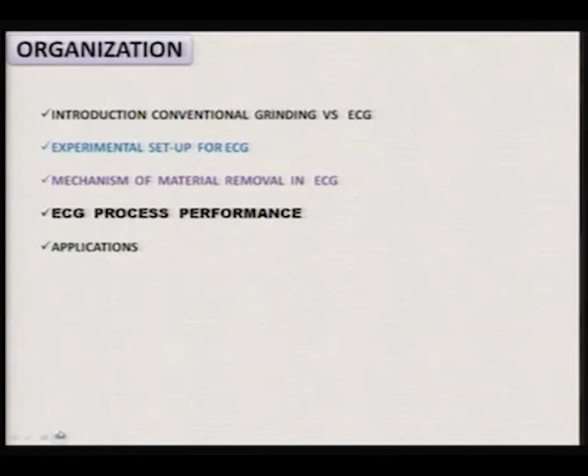Welcome to the course on advanced machining processes. Today I am going to discuss electrochemical grinding, which is an allied process to electrochemical machining and also named as a hybrid process. The organization of this talk is as follows: introduction to conventional grinding versus electrochemical grinding, experimental setup for electrochemical grinding, mechanism of material removal in electrochemical grinding, electrochemical grinding process performance and applications. After that I will discuss one numerical example also.

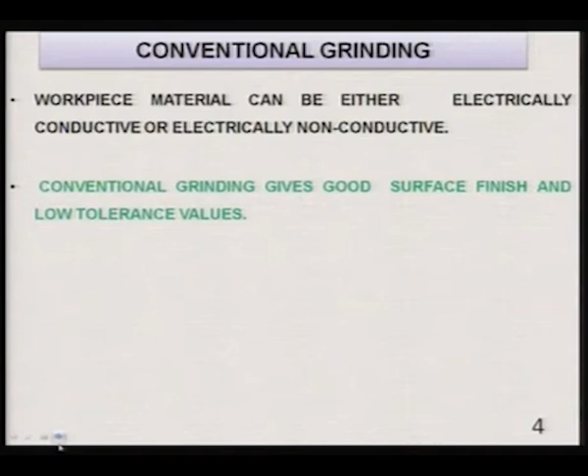Introduction to conventional grinding versus electrochemical grinding. In conventional grinding, as we all know, workpiece material can be either electrically conductive or electrically non-conductive. That condition is not required, that the workpiece should be electrically conductive. Conventional grinding gives good surface finish and low tolerance values. It produces burrs, heat affected zone (HAZ), and thermal residual stresses in the finished parts, and the finishing rate is okay. In case of conventional grinding, 100% material removal takes place by abrasive action only.

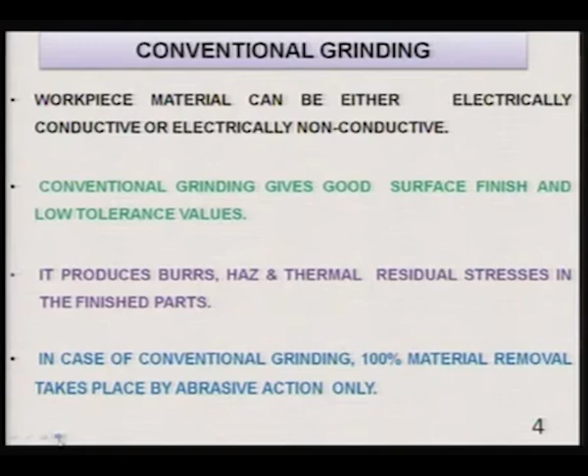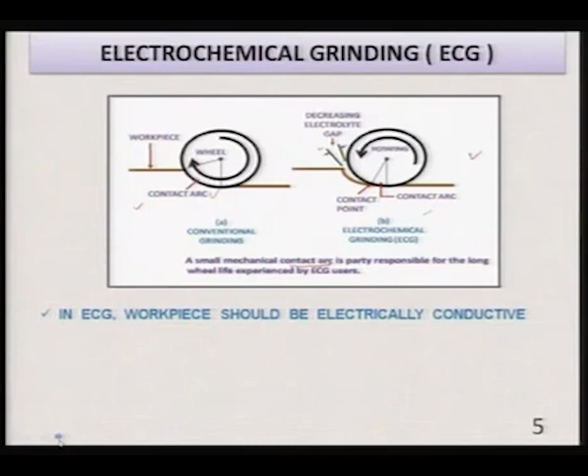In ECG, the workpiece should be electrically conductive. This is the first basic requirement, because as I will show, the workpiece is made anode, exactly same as in case of electrochemical machining, sorry, not the cathode, and the grinding wheel is made as the cathode. So both grinding wheel as well as workpiece should be electrically conductive.

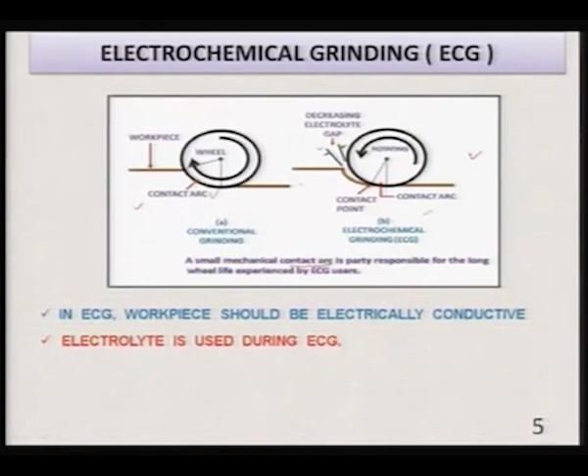Electrolyte is used during electrochemical grinding, and this is supplied with the help of the nozzle as shown on the right hand side of the figure. After proper filtration, the electrolyte can be reused or recirculated, as we do in case of electrochemical machining. For electrochemical grinding, the wheel bonding material should be electrically conductive, as I have just mentioned, since it is made as the cathode. So the material should be electrically conductive and it forms part of the electrical circuit of the electrochemical grinding process.

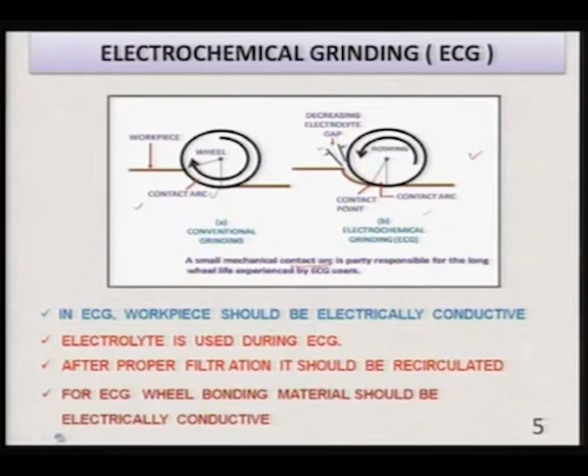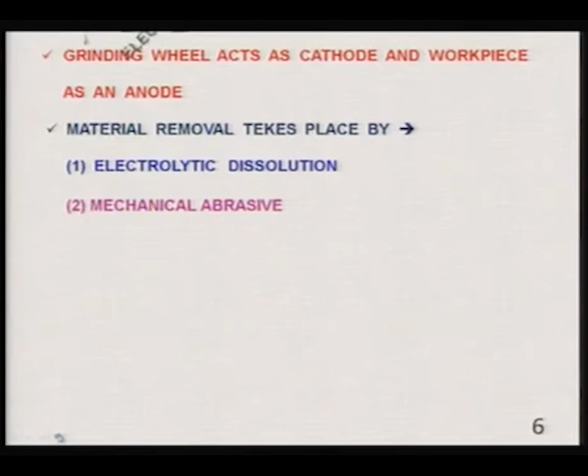Grinding wheel acts as a cathode and workpiece acts as an anode. This is very similar to, or same as, electrochemical machining, where workpiece is made anode and tool is made cathode. Here, grinding wheel acts as the tool. Material removal takes place by electrolytic dissolution and mechanical abrasion by abrasive particles, which are part of the electrochemical grinding wheel. It is found experimentally that mechanical abrasive action accounts for around 10% of the total material removal, while the remaining 90% is due to electrochemical dissolution, as compared to ECM, where 100% of material removal is due to electrochemical dissolution only. Higher wheel life is obtained in case of electrochemical grinding as compared to conventional grinding wheel life.

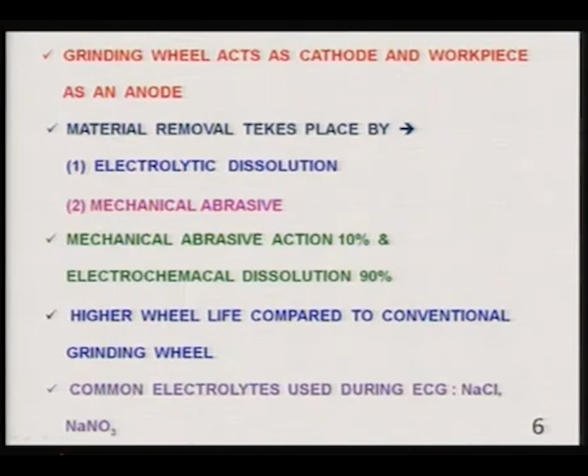Common electrolytes used during electrochemical grinding are the same as used in electrochemical machining, something like sodium chloride, sodium nitrate, and others can also be used depending upon the combination of tool and workpiece material.

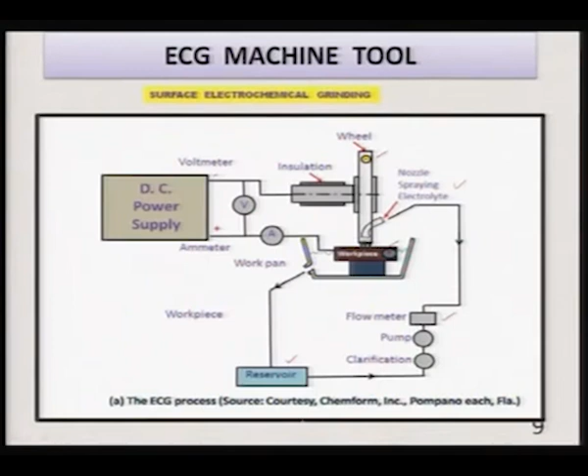Now, you can see here a flow meter is also added to the hydraulic circuit, so that you can easily measure the rate of flow of the electrolyte. Here a reservoir stores the electrolyte before it is recirculated, and here you will also have the filter.

Now, let us discuss briefly the mechanism of material removal in electrochemical grinding. This is a hybrid process, as I have already mentioned in earlier lectures, where we have combined electrochemical machining and grinding, both processes together.

You can clearly see here, to understand the mechanism of material removal in this hybrid process, this is the grinding wheel which is rotating. The whole working zone or grinding zone has been divided into three different zones or phases, as shown here. In phase 1, no abrasive action is taking place because the abrasive particles are not in contact with the workpiece. But in phase 2 or zone 2, as mentioned here, the abrasive particles are in contact with the workpiece surface, and material is being removed by abrasive action as well as electrochemical dissolution.

In phase 3, it should really be starting from here to somewhere here—this is not very precise, and this will form part of phase 2 itself. In phase 3, the wheel has lifted over the workpiece surface, and whatever burrs, etc., are formed, they are being removed—we will discuss this.

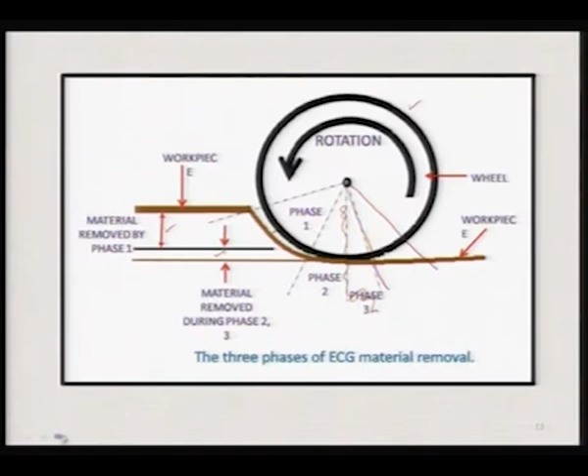Now, the important thing to see here is that material removed in phase 1 or zone 1 is shown here. In this zone, material is being removed by electrochemical dissolution alone. In zone 2, material is being removed by both processes—electrochemical dissolution as well as abrasive action. This clearly gives the picture I mentioned earlier, that three zones are there: zone 1, zone 2, zone 3.

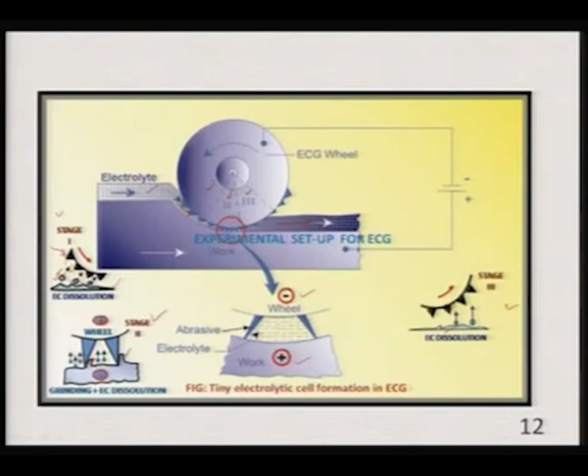But in zone 3, as you see on the right side, there is no contact between the abrasive particle and the workpiece surface, there is only electrolytic dissolution. So material is being removed only due to electrolytic dissolution in zone 3; there is no abrasive action. The same thing is described in the following slides.

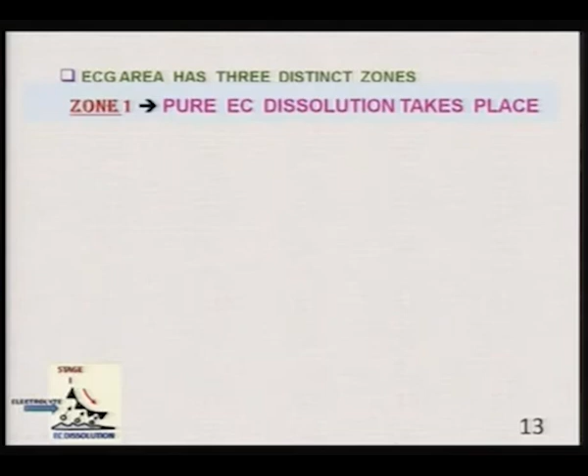ECG has 3 distinct zones, as I have shown you. In zone 1, pure electrochemical dissolution takes place, as you can see in the figure, with no abrasive contact with the workpiece.

Wheel rotation helps in drawing the electrolyte into the machining zone, because the wheel is rotating in this direction as shown by the arrow. So electrolyte will be drawn into the gap between the wheel and the workpiece, apart from whatever pressure it is being supplied at.

Then contamination in zone 1 takes place by reaction products and gases, because electrochemical reaction is taking place. So ferrous hydroxide or ferric hydroxide will be formed if iron is being machined. This, along with the gases evolved—oxygen at the anode and hydrogen at the cathode—will move forward into zone 2.

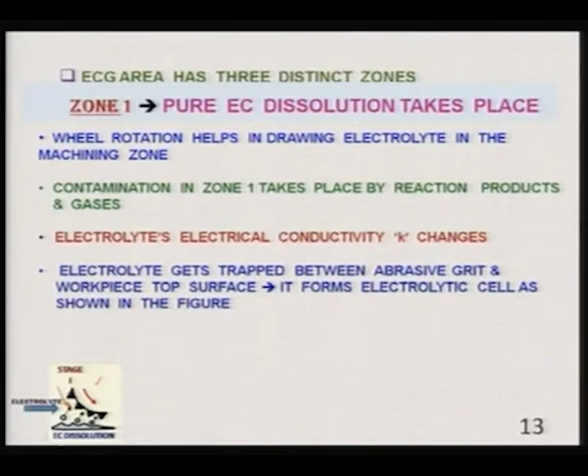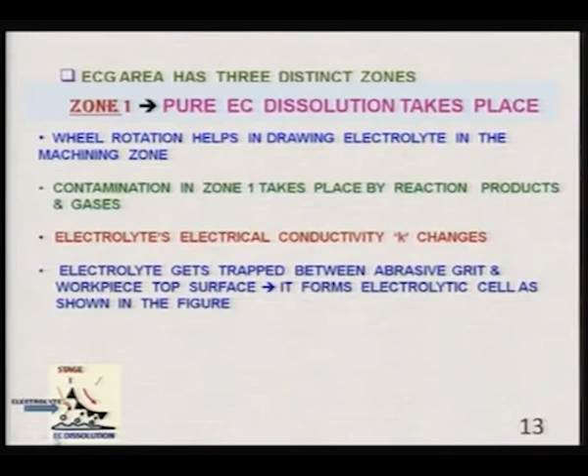Then the electrolyte's electrical conductivity will change, because apart from the pure electrolyte, it now has reaction products as well as gases, and control of the electrical conductivity of the electrolyte becomes very difficult. Electrolyte gets trapped between the abrasive grit and workpiece top surface, forming an electrolytic cell as shown in the figure. A small amount of material is removed in this zone, and the inter-electrode gap is comparatively low.

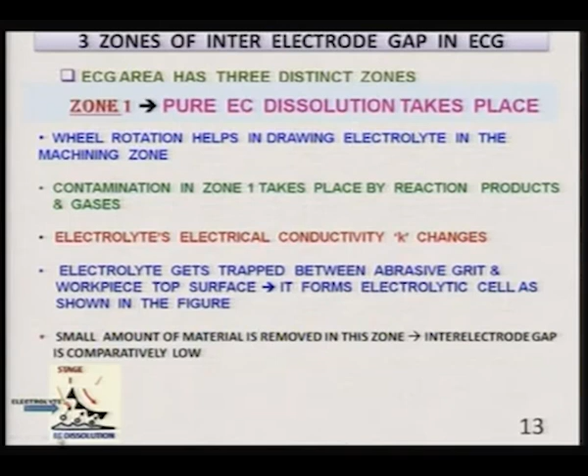In zone 2, higher pressure exists due to the converging gap between wheel and workpiece. It suppresses formation of gas bubbles and gives higher K, hence higher MRR, because the size of the gas bubbles is decreased. So K definitely increases compared to zone 1, and secondly some reaction products are added, which also change the electrical conductivity of the electrolyte.

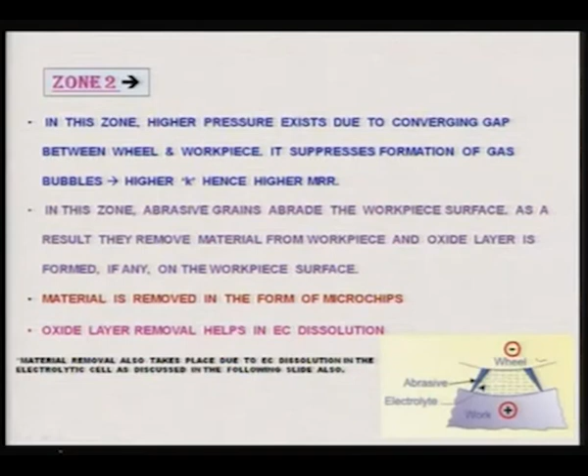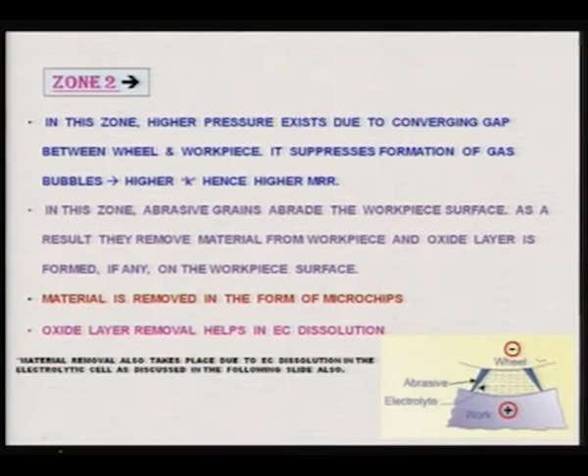Oxide layer removal helps electrochemical dissolution. Whatever oxide layer was formed in zone 1 is removed due to the abrasive action of the abrasive particles, so the rate of electrochemical dissolution increases. Material removal also takes place due to electrochemical dissolution in the electrolytic cell, as discussed in the following slide.

Types of electrolytes used in ECM: you can use acidic electrolyte, alkaline electrolyte, or neutral electrolyte. All these electrolytes we have discussed while discussing the electrochemical machining process.

Reactions during electrochemical machining, while iron is the anode and NaCl aqueous solution is the electrolyte: electrolysis of water takes place, and once electrolysis takes place you get hydrogen gas evolved at the cathode, and you get hydroxyl ions, 2OH. When iron is the workpiece, you get ferrous ions that detach from the workpiece, carrying positive charge, and electrons are also detached.

Then ferrous ions and hydroxyl ions react with each other and form what is known as ferrous hydroxide. In some cases, under certain conditions, in place of ferrous hydroxide, ferric hydroxide can also be formed.

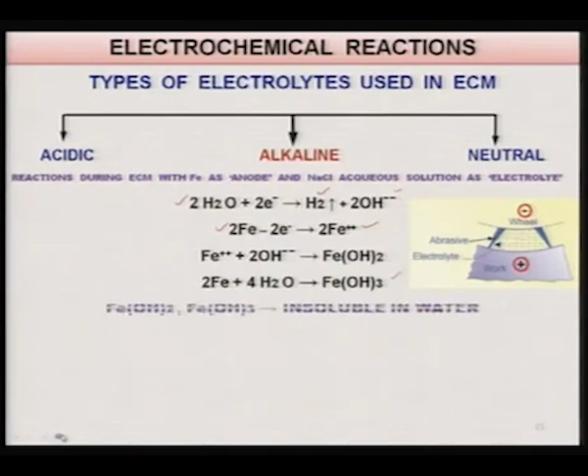Now, this ferrous hydroxide and ferric hydroxide are insoluble in water. So, they remain as such, as reaction products in the electrolyte, and positive ions convert as hydroxides, ferrous or ferric, in case of iron as anode or work material.

Now, in this particular case, as you can see here, the inter-electrode gap is quite low, and it depends upon the projection of the abrasive particle out of the grinding wheel, normally less than 1 millimeter. The voltage applied is around 8 to 20 volts.

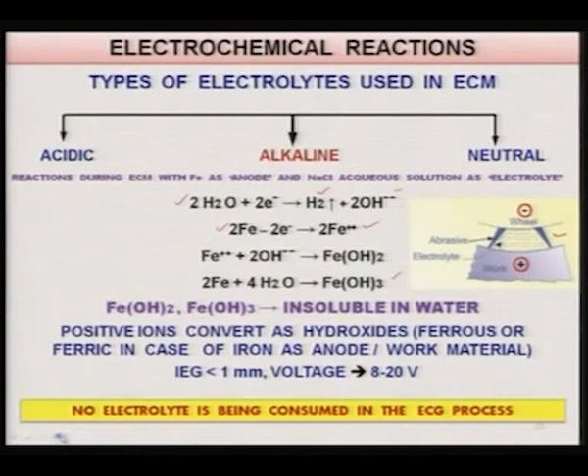Now, we can clearly see from these reactions that no electrolyte is being consumed in the electrochemical grinding process, and this was true in case of electrochemical machining as well.

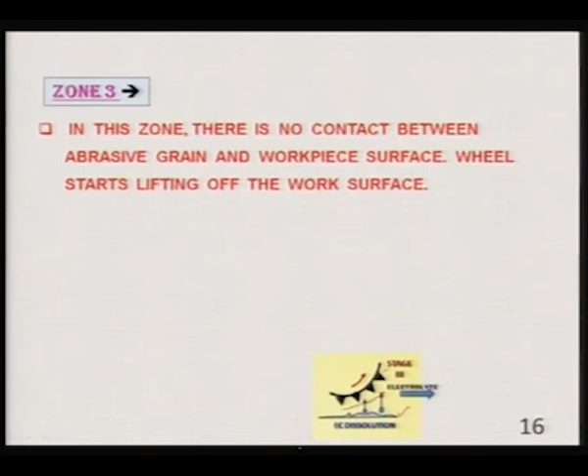Hence, material removal takes place by electrochemical dissolution only, because there is no physical contact between the abrasive particle and the workpiece, so no abrasive action is taking place. Secondly, the rate of electrochemical dissolution will keep decreasing, because the inter-electrode gap is continuously increasing in the direction of the flow of the electrolyte.

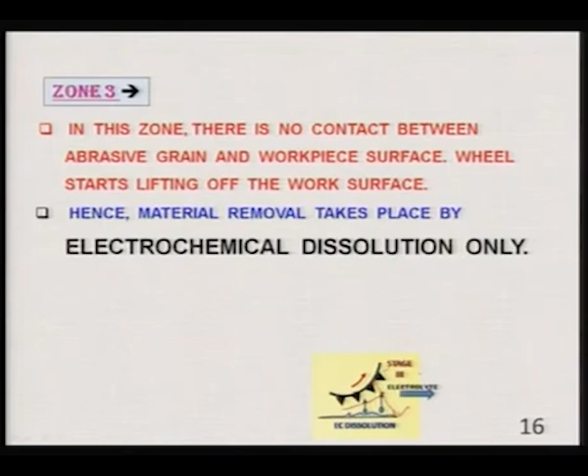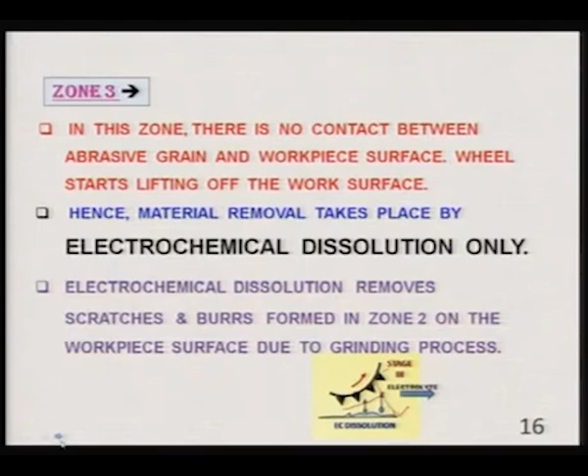Electrochemical dissolution removes scratches and burrs formed in zone 2 on the workpiece surface due to the grinding process. We have seen that material was removed by the abrasive particle from the workpiece surface in that grinding process, and due to grinding, burrs and scratches are formed on the workpiece surface. These are removed in zone 3, shown over here, so you get a burr free and scratch free surface after zone 3. This is an additional advantage of electrochemical grinding over conventional grinding.

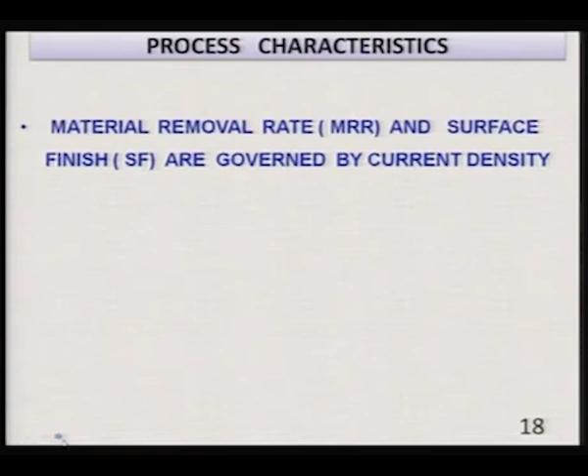Now, electrochemical process performance. Material removal rate and surface finish are governed by current density, as in case of electrochemical machining, because 90% of the total material removed in electrochemical grinding is due to electrochemical dissolution. That means current density is going to govern the material removal rate.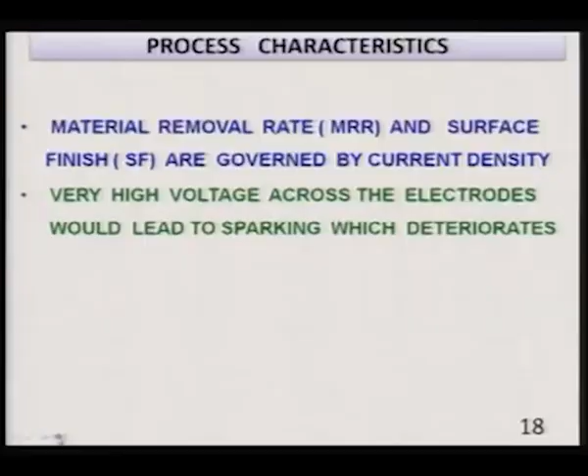Very high voltage across the electrodes would lead to sparking, so we should not use very high voltage between the two electrodes, that is the grinding wheel and the workpiece, otherwise sparking will take place, and this sparking will damage both the grinding wheel and workpiece, which is undesirable, and it will also deteriorate the surface finish. In case of electrochemical grinding, it should be ECG, not EGC.

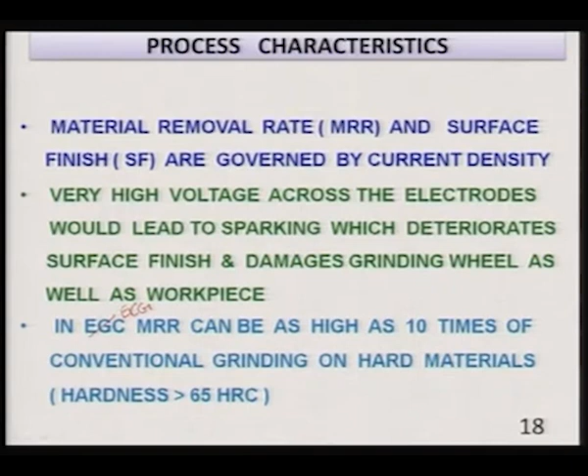MRR can be as high as 10 times that of conventional grinding on hard materials. Hard materials having hardness greater than 65 HRC can be machined by this process, and 10 times greater MRR is a very high value compared to conventional grinding. So this is an additional advantage of electrochemical grinding.

Now, you have to control the machining conditions appropriately in electrochemical grinding also, and feed rate is one of the important machining conditions. The feed rate can be calculated from the formula given in the theory of electrochemical machining. If the feed rate is higher than required, the abrasives detach prematurely due to higher depth of cut, which leads to excessive grinding wheel wear, giving low wheel life and higher cost.

Because if the feed rate is higher, say this is the grinding wheel and this is the workpiece, then the abrasive particles will penetrate more inside the workpiece, and due to the larger forces, some abrasive particles will fracture or detach from the grinding wheel prematurely. As a result, the life of the grinding wheel will go down, and the cost of electrochemical grinding will increase.

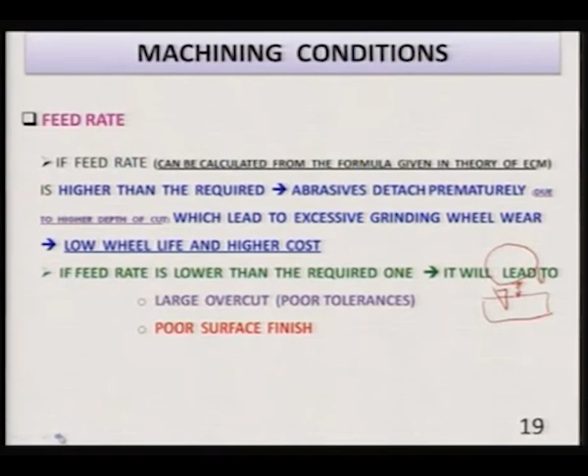If the feed rate is lower than required, the inter-electrode gap will increase, and if this gap is more than required, you will get a larger overcut, that is poor tolerances, and also poor surface finish, both of which are undesirable features. The wheel's peripheral speed is normally 20 to 30 meters per second in electrochemical grinding.

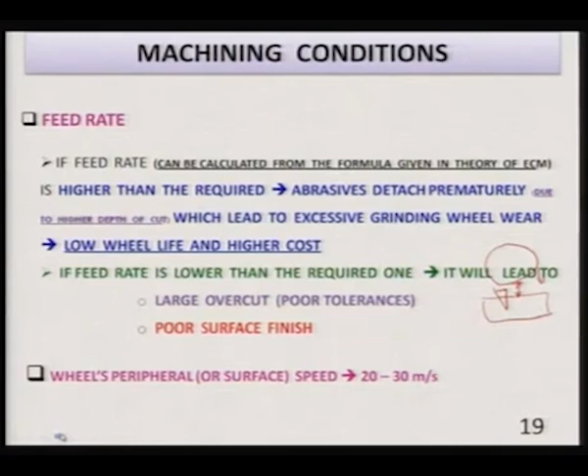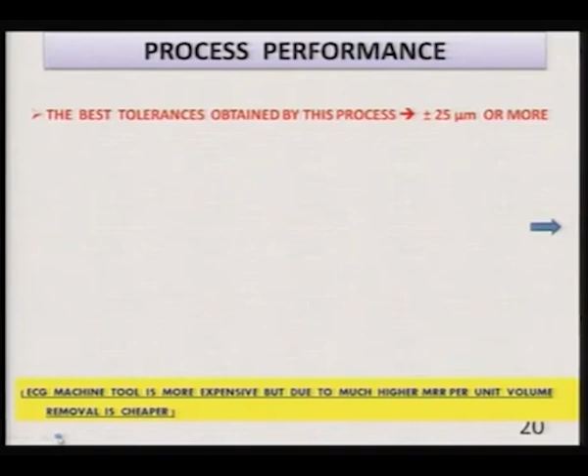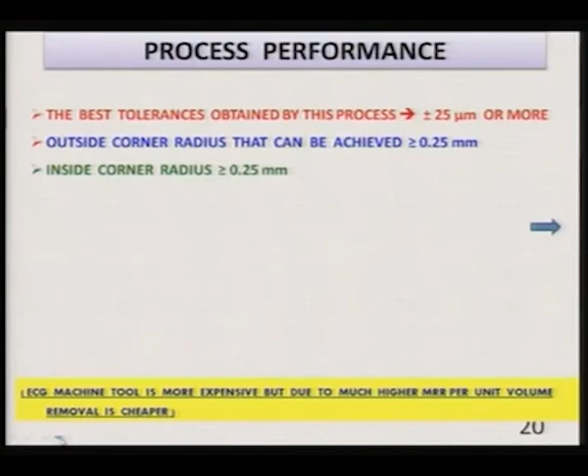Process performance continues. The best tolerances obtainable by electrochemical grinding are within plus minus 25 micron or more. The outside corner radius achievable is greater than or equal to 0.25 millimeter, that is 250 micron. The inside corner radius achievable is again the same, greater than or equal to 0.25 millimeter. Surface roughness obtainable is approximately 0.12 to 0.8 micron, lying in this particular range.

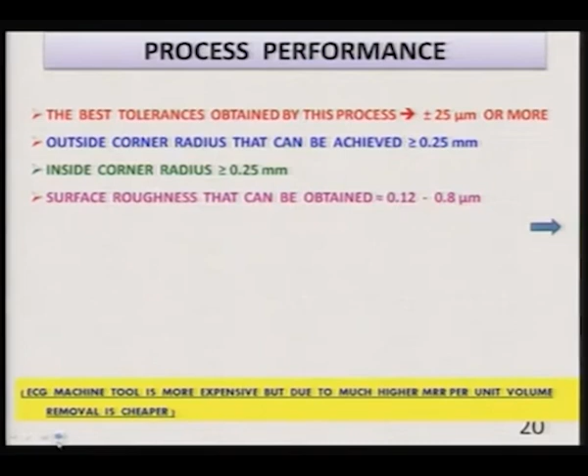Surface obtained after electrochemical grinding is free of burrs and scratches, as I have already explained in the earlier slide, because burrs and scratches get dissolved in zone 3 of the electrochemical grinding process by electrochemical dissolution.

Reduced risk of thermal damage, because the workpiece is in contact with water during electrochemical grinding. The workpiece is always in contact with the electrolyte, a solution of sodium chloride, sodium nitrate, or other salts in water, and water is a very good coolant. So the temperature of the workpiece does not rise to a large extent, and there is hardly any thermal damage risk in case of electrochemical grinding.

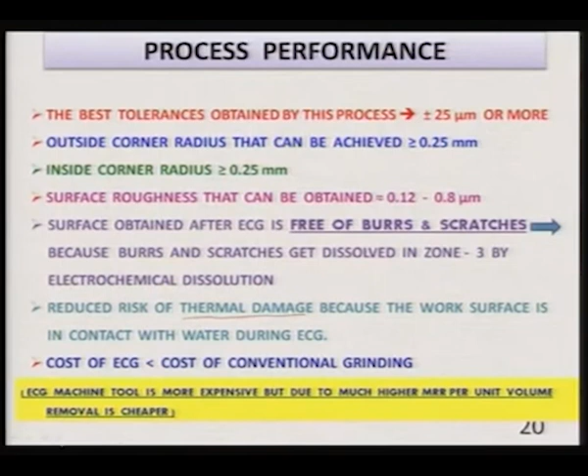ECG machine tool is more expensive compared to a normal grinding machine, but due to a much higher material removal rate, cost per unit volume removal is cheaper. Hence electrochemical grinding process is cheaper than conventional grinding, especially in case of grinding very hard materials. Cost of electrochemical grinding is less than cost of conventional grinding.

The electrochemical grinding machining chamber should be made of non-corrosive and electrically non-conductive material. Power supply to the grinding wheel is given with the help of brushes, as I have shown you in the earlier slide of the setup. However, in some cases you can use mercury coupling, which can carry more current compared to brushes, but it depends upon the designer.

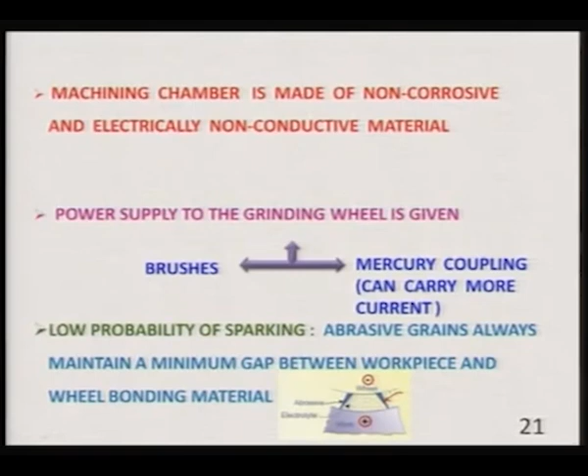There is low probability of sparking in electrochemical grinding, because abrasive grains always maintain a minimum gap between the workpiece and the wheel bonding material. As you can see here, this is the abrasive. Depending upon the magnitude of the projection of an abrasive particle outside the grinding wheel, that decides the inter-electrode gap more or less. Since that gap is always maintained, the probability of sparking between the wheel and the workpiece is minimized.

Types of ECG operations: this electrochemical grinding process can be used to perform various types of operations, such as cylindrical grinding, form grinding, surface grinding, face grinding, and internal grinding.

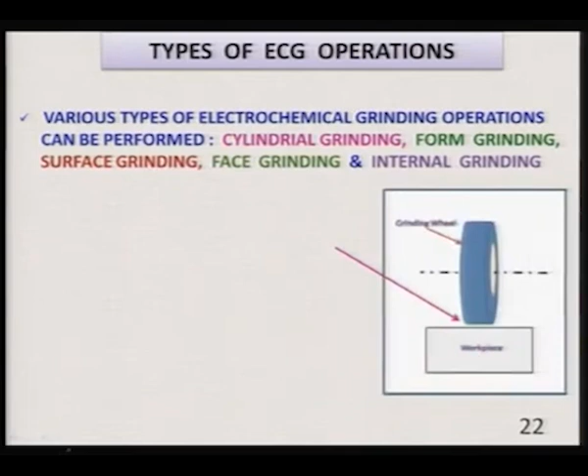You can see here clearly this is the surface grinding operation, some setup is shown. Surface grinding is slow because of the small area of contact between the workpiece and the grinding wheel, as you can see here; it is essentially a line contact theoretically. So the total area in contact with the grinding wheel is very small, hence material removal rate and finishing rate are also low.

In case of face grinding, it is fastest because of the largest area of contact between the workpiece and the grinding wheel.

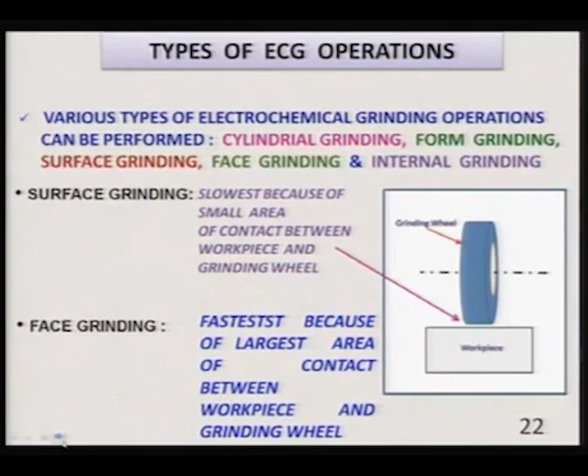Now, here you can see the bonding material used for bonding the abrasive particles in the electrochemical grinding wheel, as shown over here. The bonding materials are copper, brass, and nickel, because they should be electrically conductive. These materials have good electrical conductivity, so they are commonly used as bonding material for electrochemical grinding wheels.

Now you can clearly see the role of the abrasive particles in surface grinding. These abrasive particles remove material by abrasion, while this forms the electrolytic cell. Because of this electrolytic cell formation, material is also removed due to electrochemical dissolution from this area, while the abrasive particles remove material by chip formation.

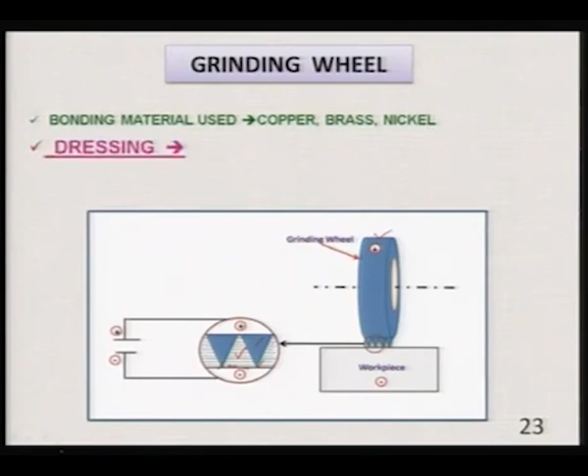Dressing is very important. It takes a lot of time to dress grinding wheels, and it costs a lot in the case of conventional grinding wheel dressing.

Now, what is done in case of electrochemical grinding dressing? As you can see in the earlier slide, the grinding wheel was made the cathode, but in this particular case the grinding wheel has been made the anode, and the workpiece, here, has been made the cathode. Now material is removed from the anode, so in this case material will be removed from the grinding wheel, which is made the anode. As a result, whatever material was deposited on the grinding wheel due to clogging gets removed.

You want to remove material from the grinding wheel to allow fresh particles to project for the grinding operation. So that material is dissolved from the grinding wheel, and once it is dissolved, fresh abrasive particles project outside the grinding wheel and perform the grinding operation rather than the blunt abrasive particles. Once you remove material from the grinding wheel, the blunt abrasive particles get pulled out, and you get better performance of electrochemical grinding once dressing of the grinding wheel has taken place.

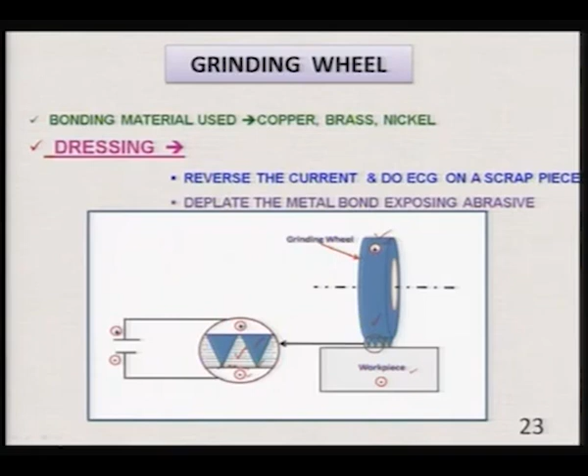So, when you make the grinding wheel the anode, it depletes the metal bond, exposing the abrasive particles as shown here. Let us now see some applications of the electrochemical grinding process.

Economical grinding of carbide cutting tools.

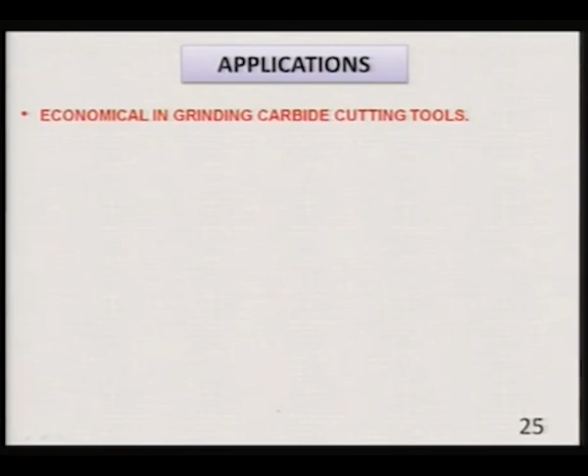Electrochemically ground cemented carbide workpieces have no damage to the microstructure, and hardly any micro cracks are created.

For reprofiling worn locomotive traction motor gears, this process has been used. There is no effect on gear hardness when grinding or finishing gears by electrochemical grinding operation; hardness is not affected or changed.

You get burr free sharpening of hypodermic needles, which is very important. Even a single burr in the needle will create a lot of pain for the patient.

Superalloyed turbine blades and fragile honeycomb metals can be ground by this process.

It is also concluded that fine grade and low concentration wheels show a tendency to draw more current, and thereby give higher material removal rate than coarse grade and higher concentration grinding wheels.

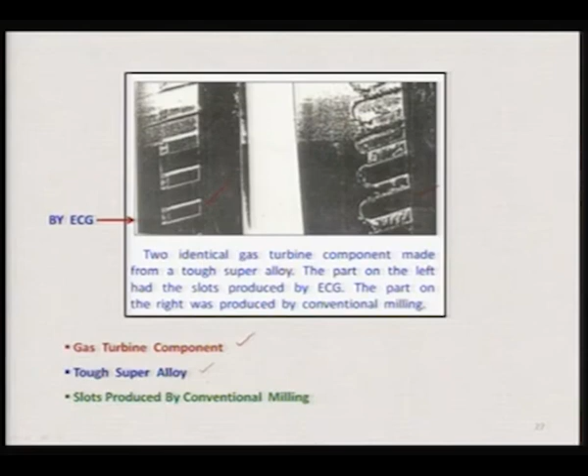You can see here two identical gas turbine components made from a tough superalloy. The part on the left had the slots produced by electrochemical grinding; you can see clearly. The part on the right was produced by conventional milling, and you can see lots of burrs and inconsistency in burr size, while on the left side there are no burrs. So it can be used for gas turbine components, for grinding tough superalloys, for producing slots.

Now let us take one numerical example related to the grinding process. I will write here on the board: during electrochemical grinding, a workpiece is ground with the following data.

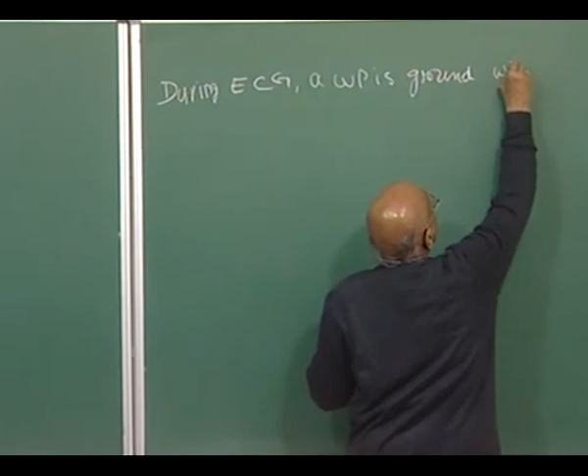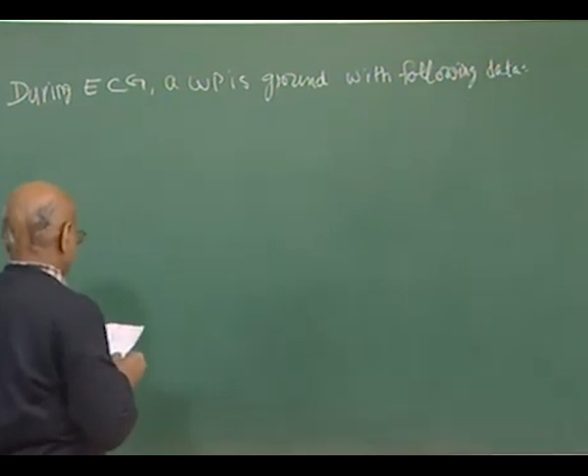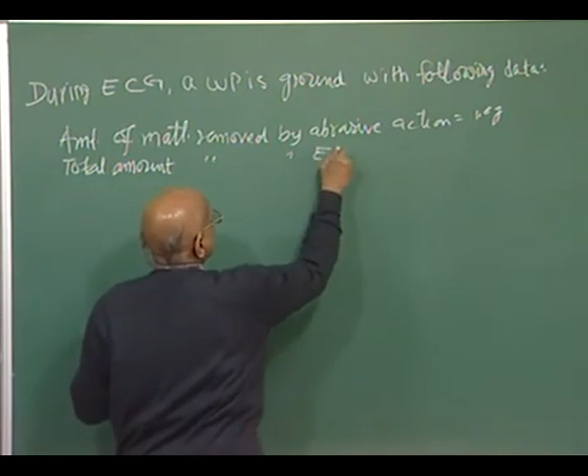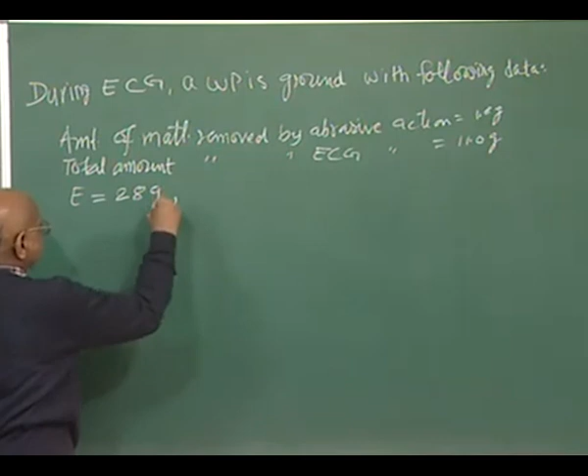Amount of material removed by grinding operation alone, by abrasive action, is 1 gram. Total amount of material removed by ECG, electrochemical grinding action, is 11 gram. E value of the workpiece, the chemical equivalent, is 28 gram. Current being supplied, I, is equal to 20 ampere.

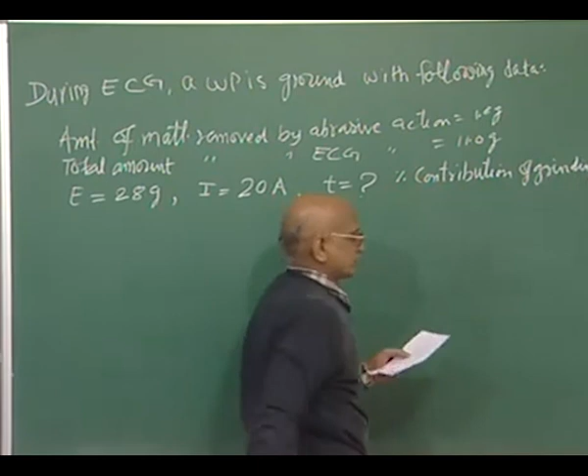Now with this data find out the time T for electrochemical grinding, and then the percent contribution of grinding, percent contribution of grinding in ECG, and MRR in ECG. Solution.

We know the formula from Faraday's law of electrolysis that M equals I E T over F, where I is the current in amperes, E is the chemical equivalent of the anode material, that is the workpiece, which is 28 gram, T is the machining time which we have to find out, and F is Faraday's constant, which is 96,500 ampere second.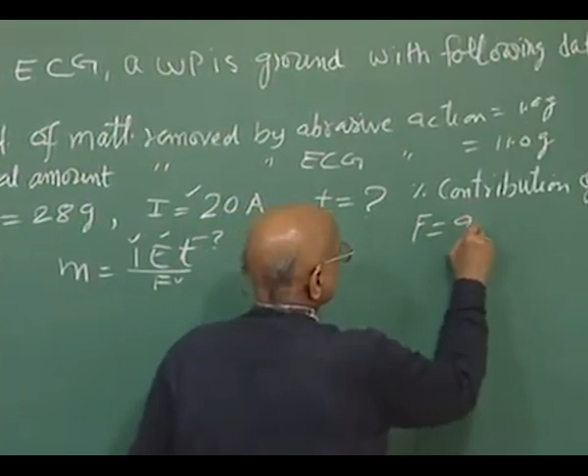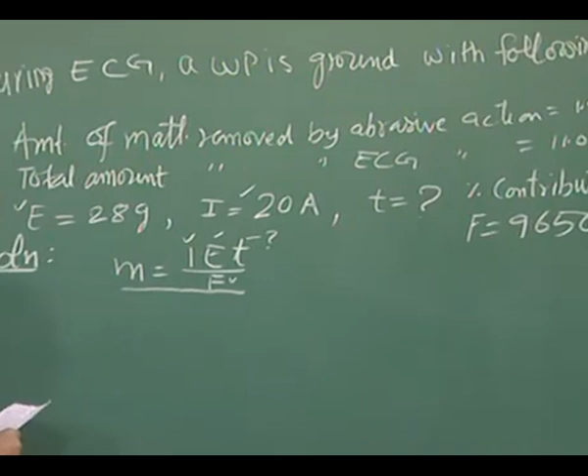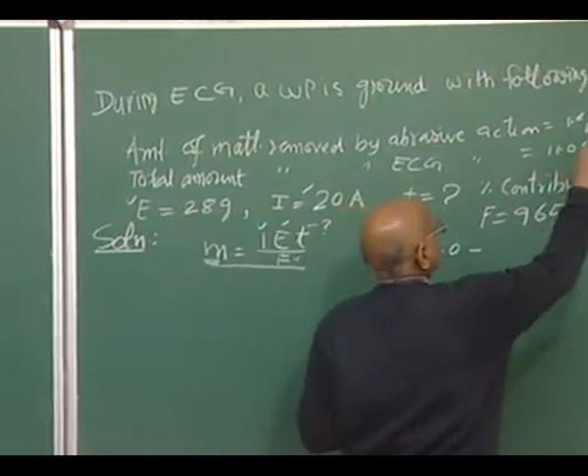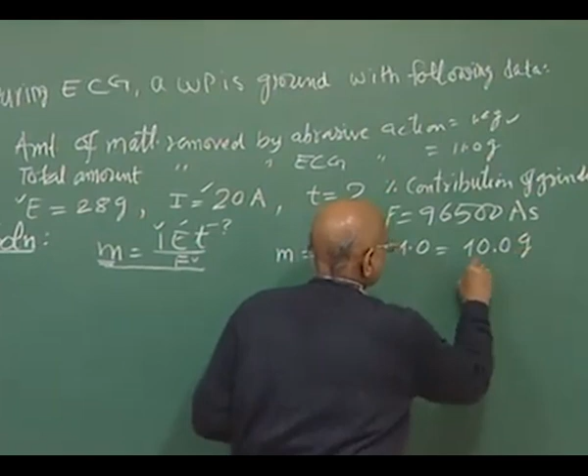Now let us use this formula for finding the time. This M is the electrochemical dissolution contribution to total ECG. So we will calculate this. M is equal to 11 gram, the total material removed in electrochemical grinding, and 1 gram is the amount of material removed due to the grinding operation, or abrasive action. So it becomes equal to 10 gram as the contribution of electrochemical dissolution in the electrochemical grinding process.

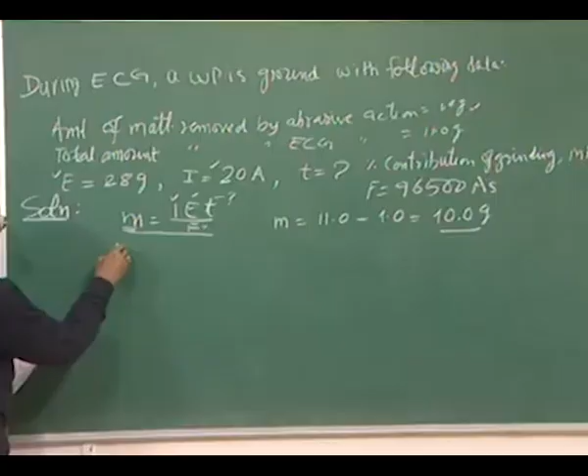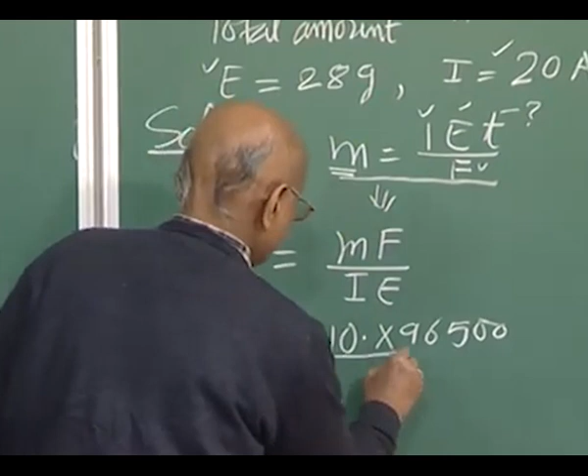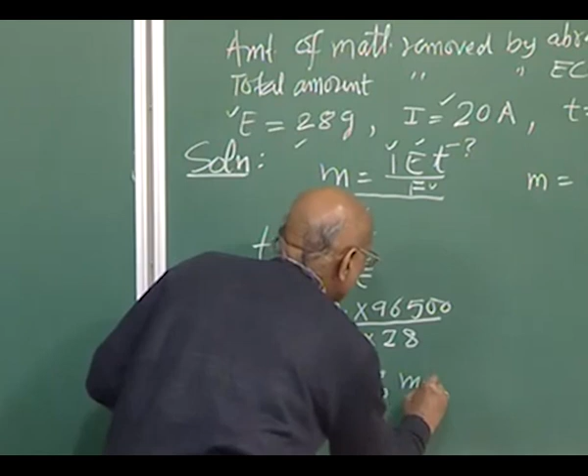So it is quite slow in this particular case, because the current flowing in the electrochemical grinding process is quite low, so it is taking quite long time.

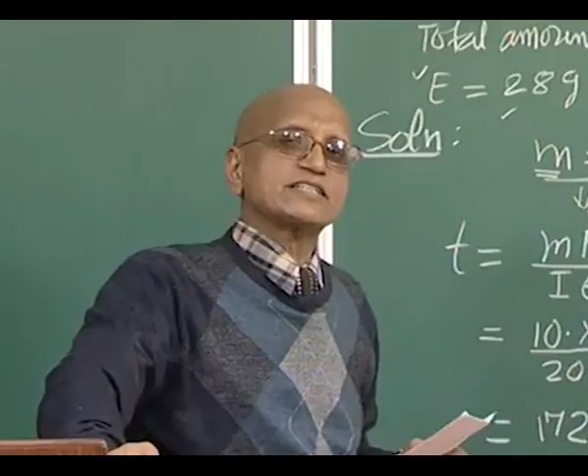Now the next question is, what is the contribution of grinding alone in percentage? So we can write 1 gram divided by 11, into 100. You can calculate that will come out to be approximately 9%. So grinding contribution in this particular case is just 9%, while electrochemical dissolution contribution comes out to be 91%, which is quite high.

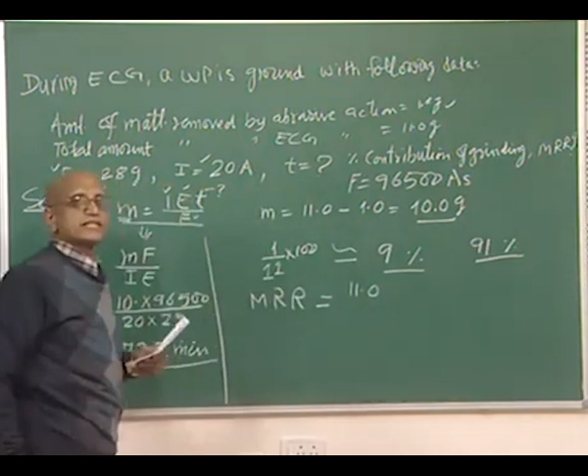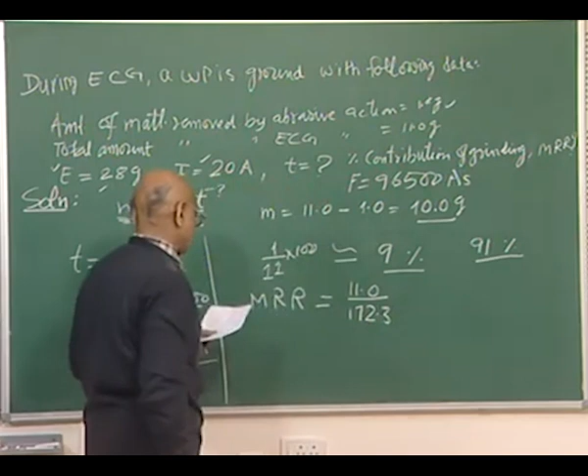Now we can also calculate material removal rate. In case of ECG, we already know 11 gram is the amount of material removed, and total time taken is 172.3 minutes. So we divide by 172.3, and this will give approximately 0.064 gram per minute.

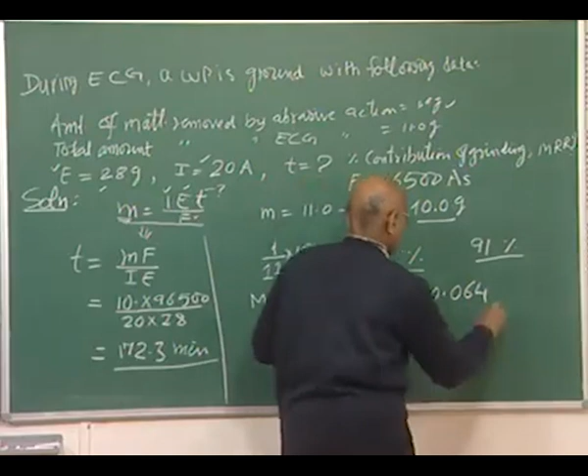Now a very important point here to note is that in grinding operation we are more concerned with finishing rather than really removing a large amount of material. So we do not want a very high material removal rate, as opposed to electrochemical machining, where the objective is to shape and size the workpiece, so a large amount of material needs to be removed and a high material removal rate is needed.

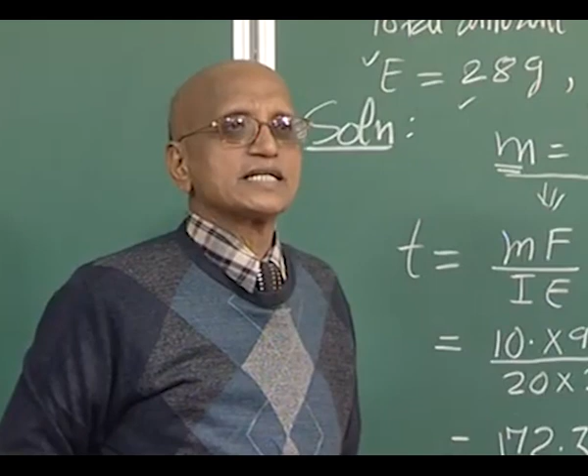So in this way, using the same principle as in electrochemical machining, you can calculate the electrochemical dissolution contribution, and the rest will come out to be the amount of material removed by abrasive action, and you can solve different kinds of problems. Thank you very much.